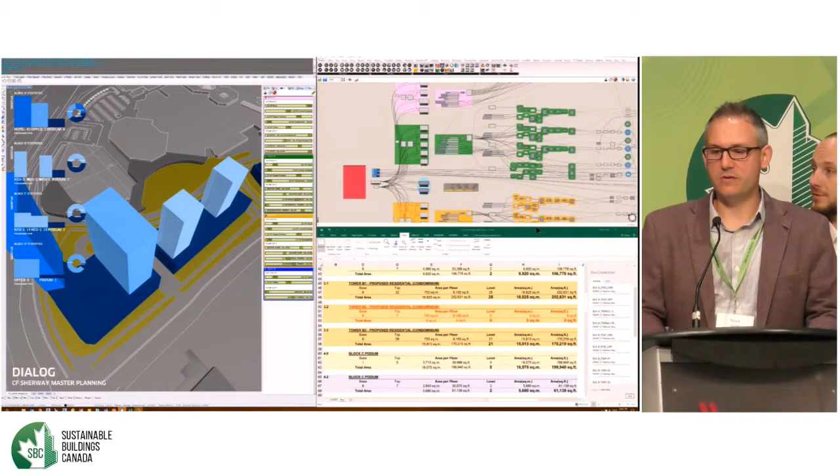feedback. So as you're doing the design, what you're seeing is there's a heads-up display that actually gives you your performance data as well as your areas; anything related to construction or the building in general can be defined as a dynamic variable that helps you through the process of design.

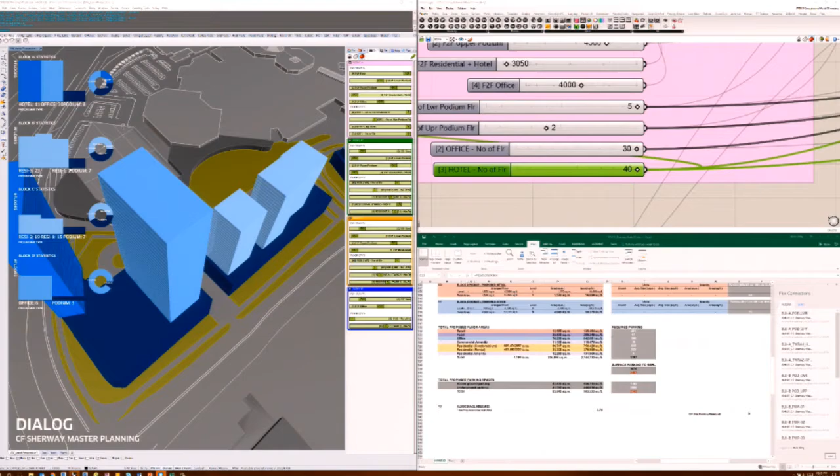So as we move forward, we have all of these interesting technologies and these ways that we're trying to design buildings, but this is where we're still at: 100% glazed facades, which are obviously not a very high performance building type. So what we're trying to do is address that and make it a high performance building type.

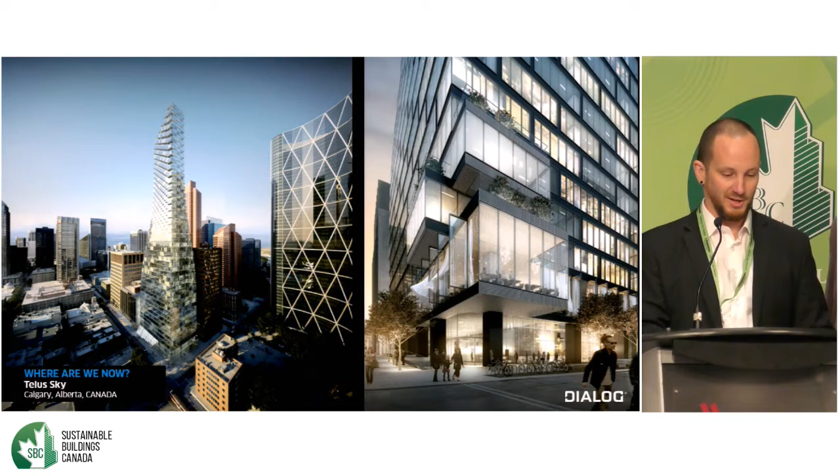And the goal here, or the idea, is not to call out these buildings as being particularly bad. Both of the designs that we just showed achieved or are pursuing high levels of certification through the LEED program, and were really designed by teams who were trying to do the best that they could with the parameters of the design that they were working with.

I think it's important to note at this point that these are somewhat the product of energy codes and standards that have set a line for performance where we can still trade off a poor thermally performing envelope with better but less permanent systems within the building. So you're keeping a 100% glazed facade, but you're driving really low lighting power densities. You're really maxing out your HVAC efficiencies. And unfortunately, those systems can somewhat be temporary or subject to the whims of a tenant or future retrofits.

It's not always going to be like for like, and this tends to lead to drift in building performance over time if they're not properly maintained. Whereas a really well designed, detailed, and installed section of opaque wall should really last and continue to perform at its design level for the life of a building.

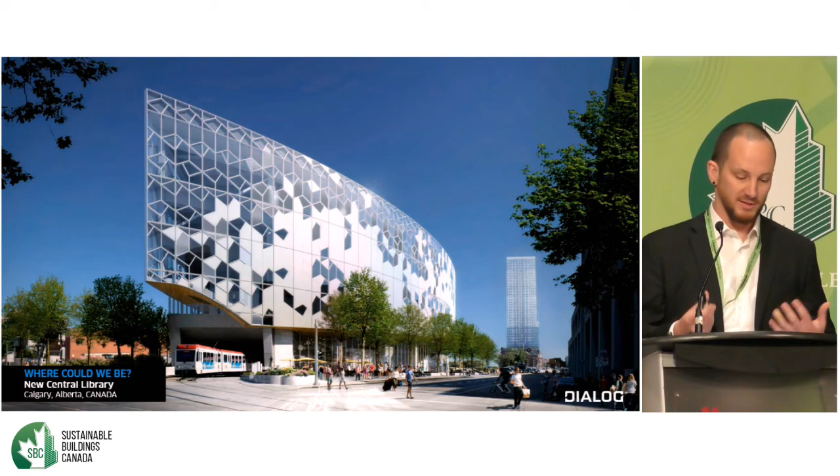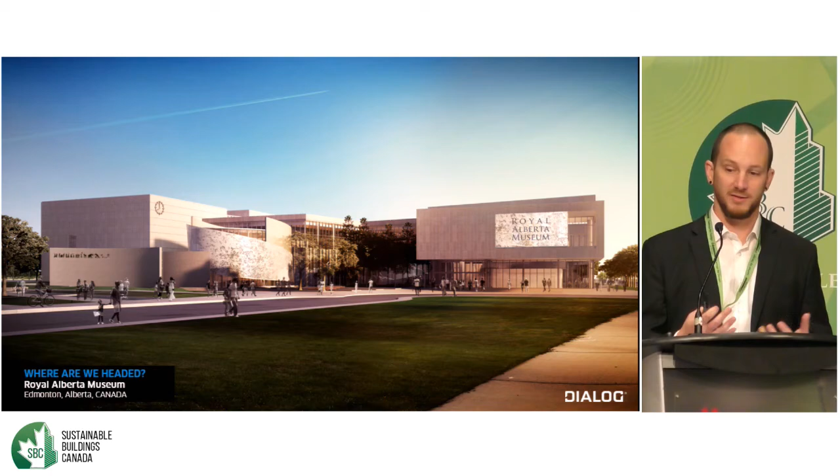With the Royal Alberta Museum, there was the idea again of keeping the window to wall ratio as low as possible. So glazed areas were clumped around the big feature lobby and reception areas, while maintaining a very highly insulated opaque section. This has also really helped control for the strict environmental requirements that are inside gallery spaces in museums.

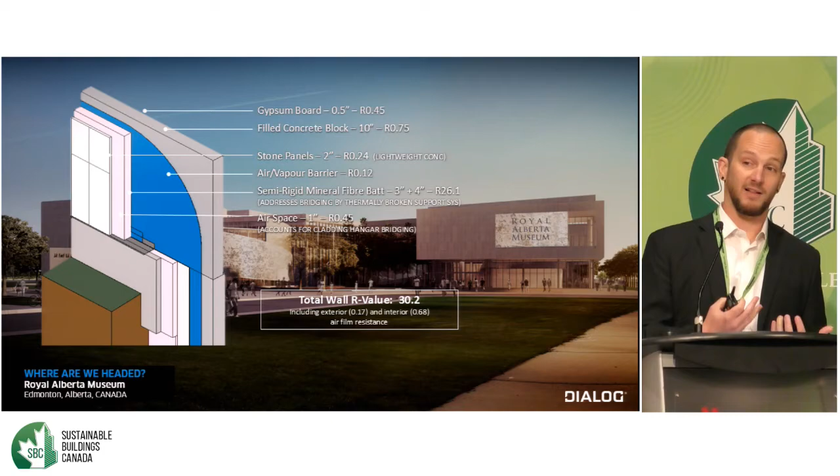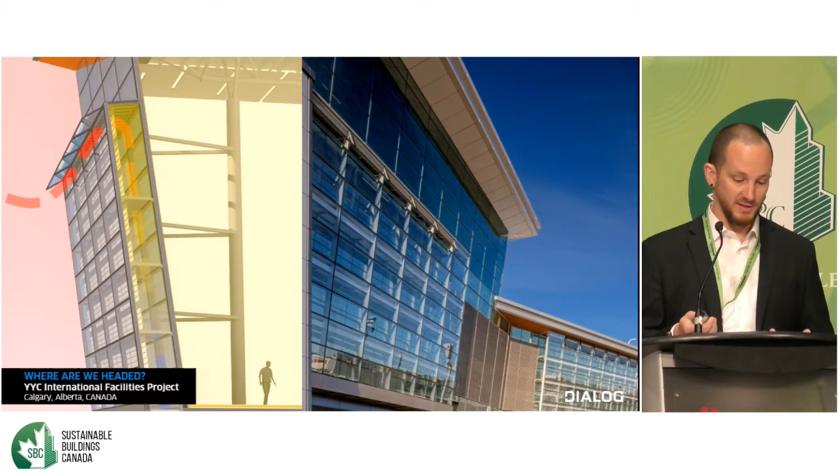Because obviously design is your first kick at the can in order to actually address performance and build for a sustainable future. But before you get there with this specific client, there's a sense of education that needs to be had in terms of teaching them that it may not necessarily cost more, or the value and the return is actually there, they just don't know it yet.

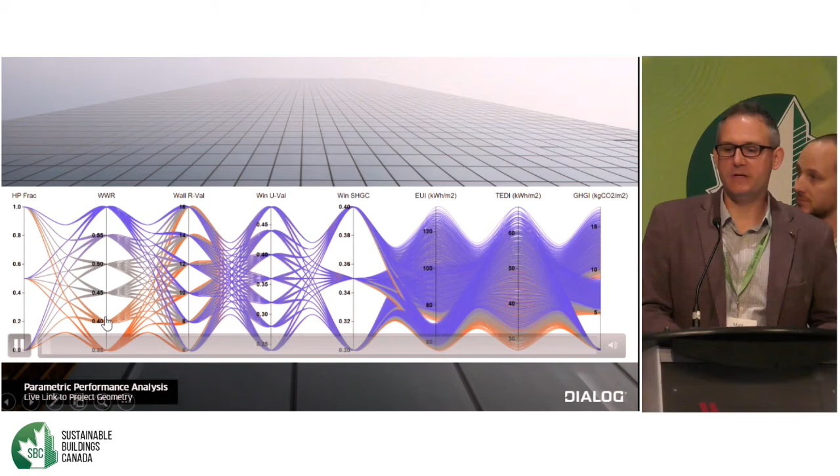Yeah, that's funny actually. Everyone's laughing. No one's done that before. And this is a room full of geeks.

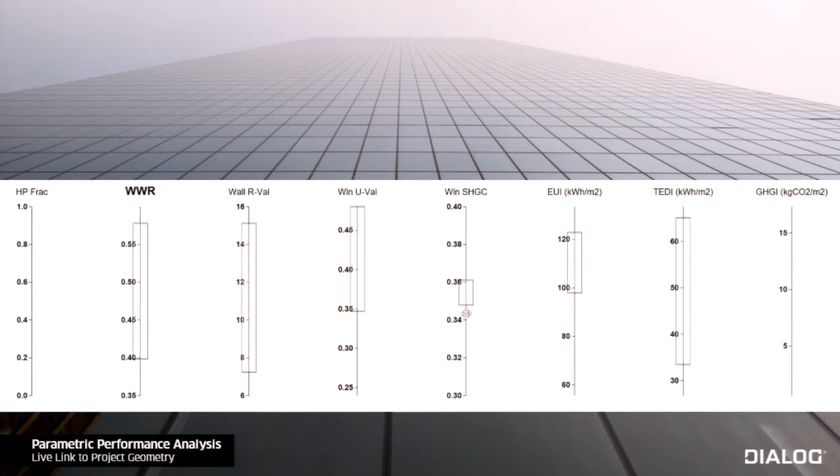So what we're doing here is we're actually limiting different targets, and we're trying to explain to the client as we're targeting this, what are our overall energy targets? What is the standard we're trying to achieve? And this is just a graph that plots what our number of possibilities are. So obviously if we're looking for something that's significantly high performing, the thread is going to get very thin, right? But as we broaden our horizons and we start to incorporate things like systems into this, then we can start to address the different elements.

I mean, so are we there yet? There's been a lot of talk of future codes, standards, and rating systems that are coming out that are really driving energy efficiency even deeper into what's necessary for building design. And with a lot of these, particularly things that are ratcheting upwards, like the 2030 challenge, new targets under version 4 of LEED, are pushing that bar high enough that things are really going to have to start being addressed at the building skin. We're moving beyond the regime where we can just trade off fancier systems and control routines on the inside of the building, and need to start building a more resilient thermal envelope on the outside.

I remember when the 2012 version of SB 10 came out, and thinking like, oh, well, that's the end of window wall condos. But it clearly hasn't happened after 5 years. And so there really is that feeling that there's something that needs to be pushed a little further to make sure that we are actually building these buildings that have a degree of passive survivability and are truly resilient.

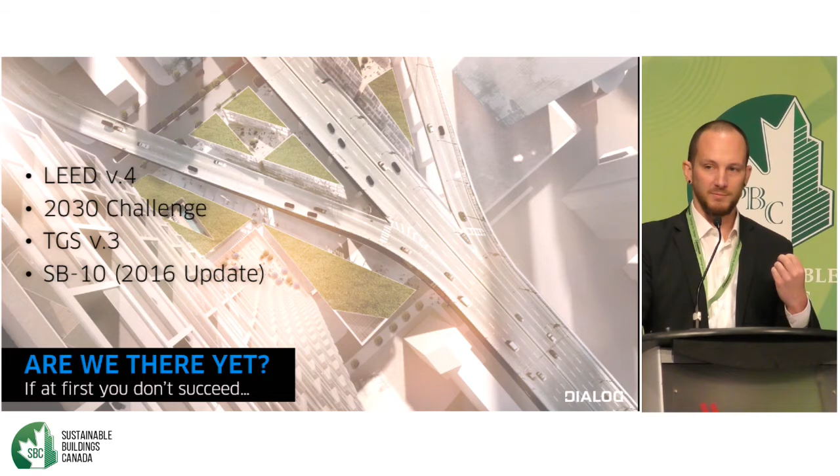And even some of these new codes, particularly City of Vancouver's new energy standard, as well as the CAGBC's Zero Carbon Building Program, are starting to include metrics that have to be met that exclusively address the building envelope, thermal energy demand intensity, or TEDI. And I believe it is coming quite likely to the new Toronto Green Standards. So it's something that the industry as a whole is going to have to really wrap their heads around as far as just what these high-performing envelopes that are needed are going to look like and what it's going to take to put them all together.

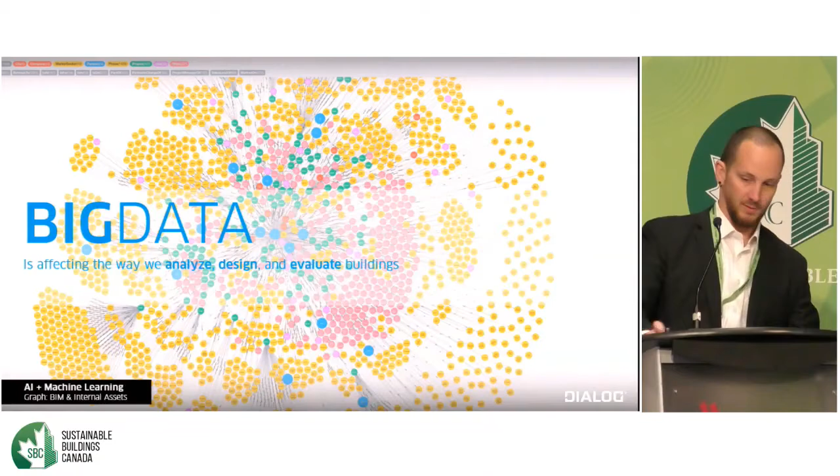So what does big data have to do with all this? Mike, I'm sure, will be able to talk to that. But essentially, all of these standards that have been and are being developed, policies that are being developed, building performance, pre-design, design, post-occupancy. We have a couple of initiatives going on right now where, on one of our projects in Vancouver, the Nest, we're working with researchers to analyze Wi-Fi patterns to understand and compare those against building heating and cooling loads, where people like to sit, so psychometric analysis. All of this information we're actually warehousing and keeping track of. And our systems that we're showing you computationally in our design systems are actually informed by these things.

What you're seeing in the graph there is a series of active connections. This is a machine learning graph that is actually adapting as things are happening. So as we pull in live information from all these various sources, whether it's design that we're working on within the studios, or whether it's coming in from this research Wi-Fi analysis of the Nest, these connections actually populate new metrics. And so we start to understand what is connected to people, buildings, performance. All of these things actually start to develop autonomous relationships with one another, which is really interesting and is really helping us guide the way that we design buildings because it helps push us in directions that we may not have thought of previously.

So this is a project, again, with EllisDon, Andrew, we just met a few months ago, where we use this building as a prototype. So this was a design build with EllisDon. And what we did was we used this building, as I said, as a prototype to study, and this is a video actually, so I'll just talk over this video, that shows how we're analyzing solar radiation gain at the same time that we're actually using that information to design the building's facade.

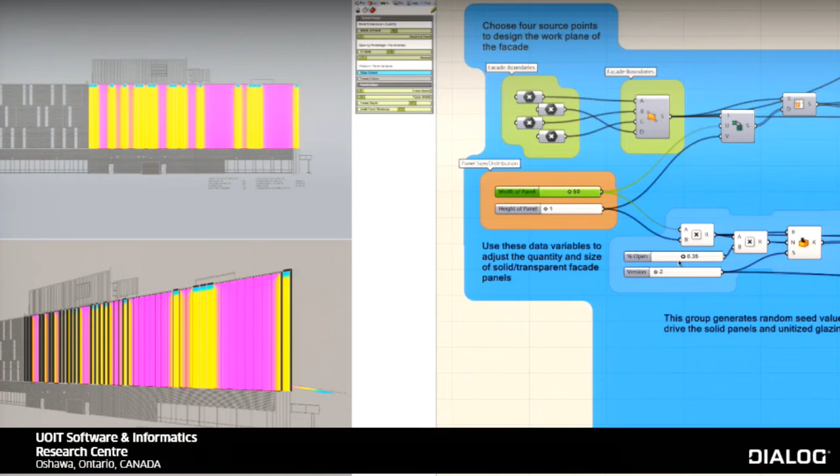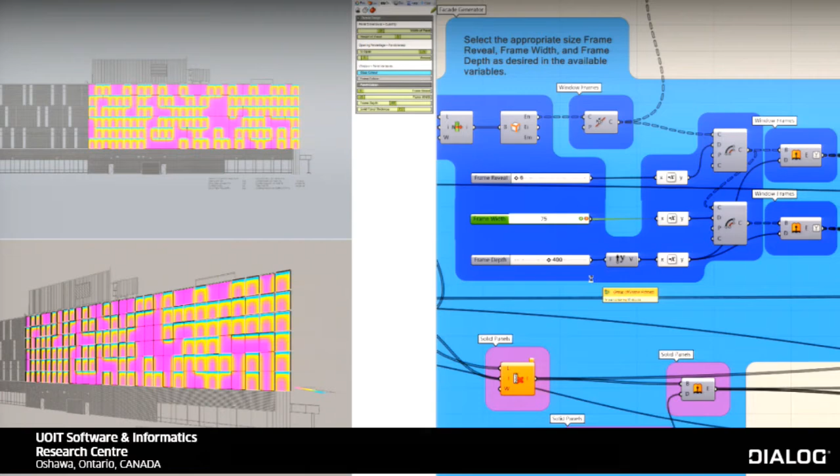So this was a post-design analysis. We used this as a case study to try and figure out what could we have done with our unitized glazing units versus our solid panels? If we had to put shading devices or extruded mullions, how much energy would that have saved? How much shadow could we have cast? And you can't really see it, but in the bottom right corner of the top left window, we're actually calculating in real time the cost that's related to these decisions. So we have a concept of design, we have a concept of performance, and we have the context of the local municipal cost of something like that in that market.

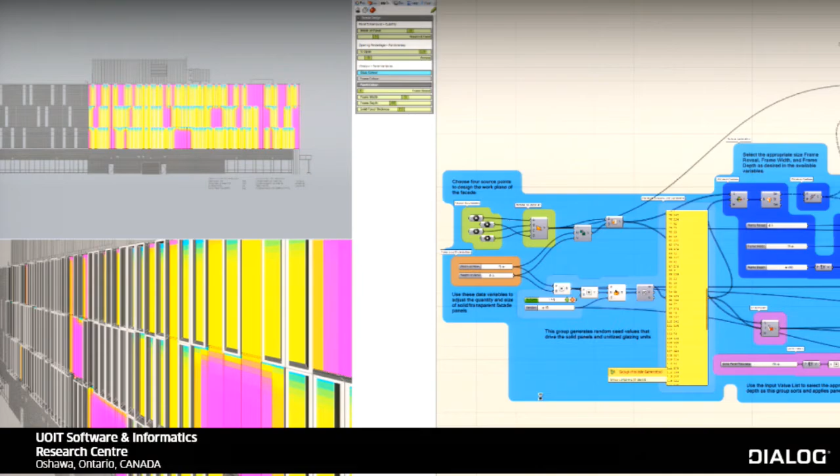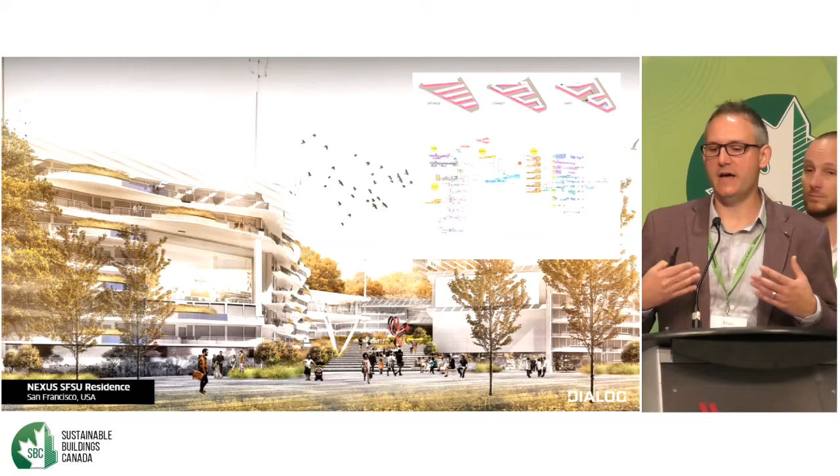So I'll just go to the next slide. So this is another example where we used computation to essentially design the building's form based on performance factors. So in the top right corner, what you can see is how we graphically step through different iterations of the design. And below that, again, you see that wire diagram that essentially establishes all those connections that harness the information that helps us define the shape of that building and what that means for performance and orientation and, again, psychoanalysis. This is a student residence, so how people share rooms, how they perceive space, right?

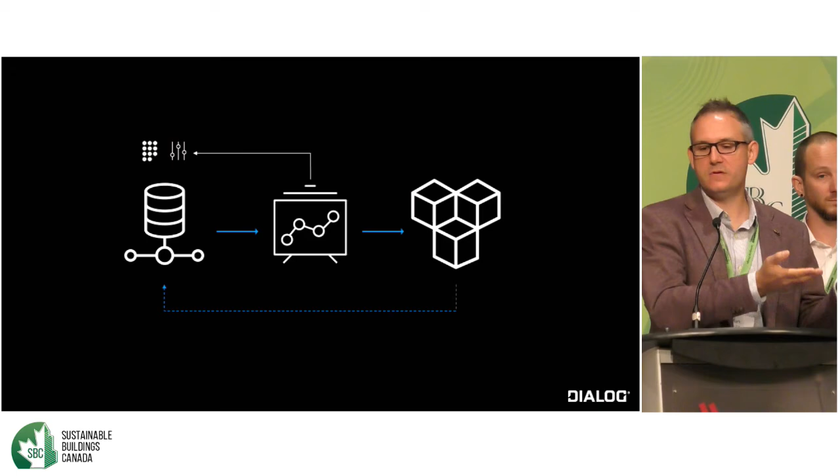And those are elements that have ranges that we can actually play with to help us dynamically define how the design and the systems work and how we can incorporate. So it allows us, just like that graph you guys saw where we were charting the trajectories of our possibilities, we can do the same thing with the standards or performance that might be available to us. We may select one type of system, VAV or something like that, for example, which might have an impact on and define what our options are in terms of glazing performance down the line, right? So these are all the things that are dynamic.

Then what we do is we chart that into our system, we bring it in, and that defines geometry or form. Well, it doesn't define geometry or form, but we use that to make decisions on what the building looks like and how to plan the space. And then through those decisions, we find out that there are problems and we need to redefine those. And so we go back to the beginning, and that's the iterative process of design. It's just a little bit more informed now.

So lastly, the last video we have is essentially visualizing, and you'll have to bear with us because this is still very much in development, so the graphical user interface is a little bit rough. But this is what we're using to talk to clients, where we sit down and we have a series of baseline metrics, and we say, okay, we're going to target LEED, or we're going to target 2030. What are some options we can use if we choose a window wall ratio of a certain factor versus our R value for our envelope, and what is that return in terms of EUI reduction based on those decisions?

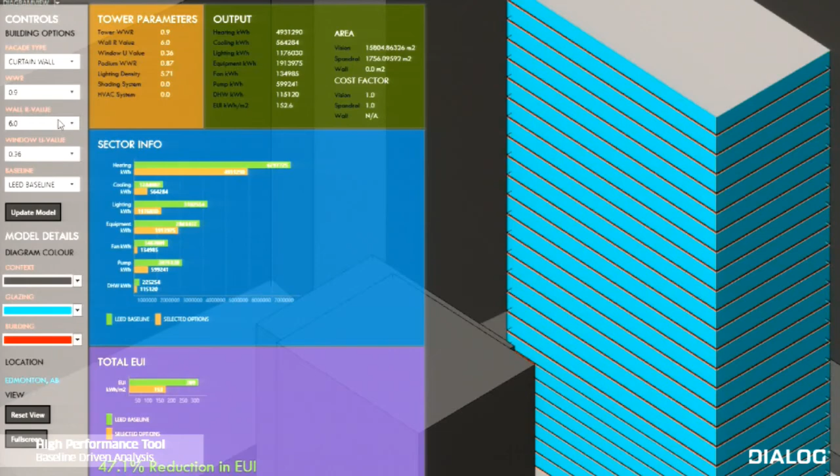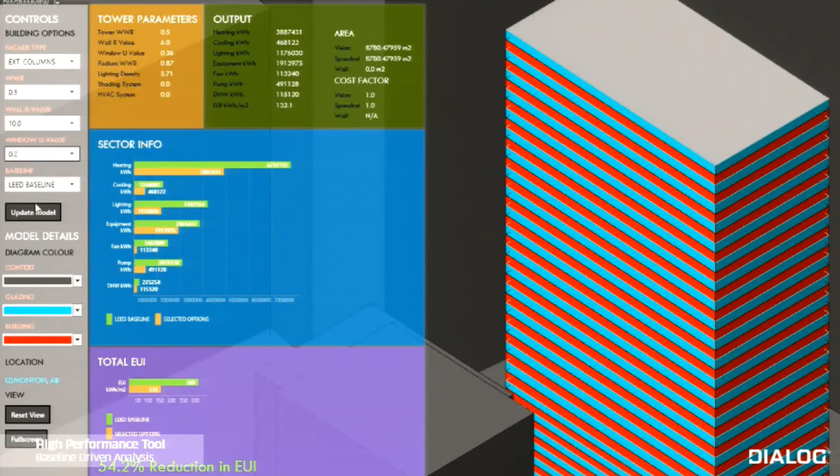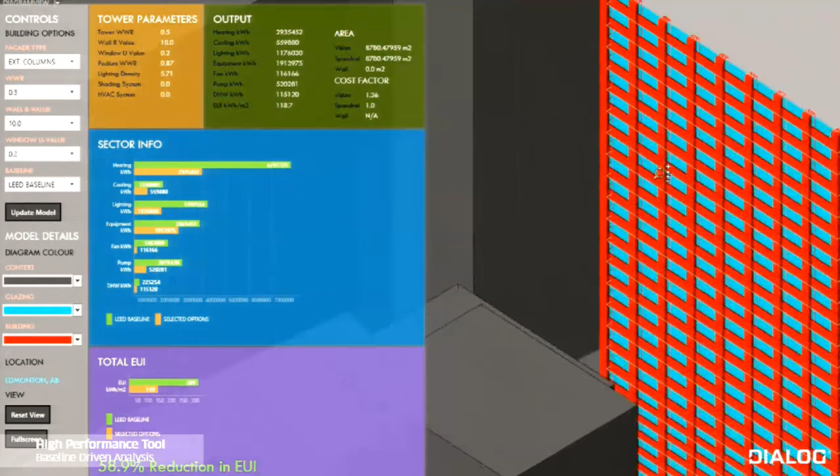So you can see as we move through here, on the left you'll see the red is solid, the blue is the glazing, but as we start to discuss different levels of opaque facade and vertical columns, so we can do exterior exposed vertical columns, we'll obviously see that our reduction will go up, right, because we've got less glazing. So we're just trying to educate the client, and obviously we wouldn't present it to them in this manner with some ghastly solid columns. We would actually create something that's a little bit nicer.

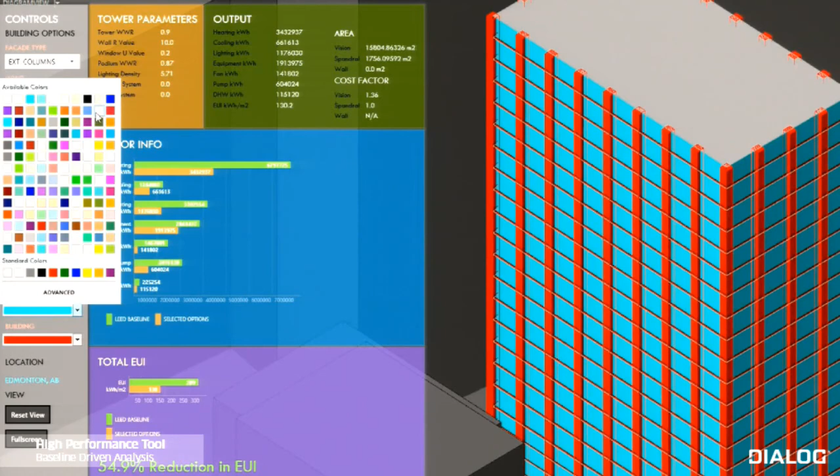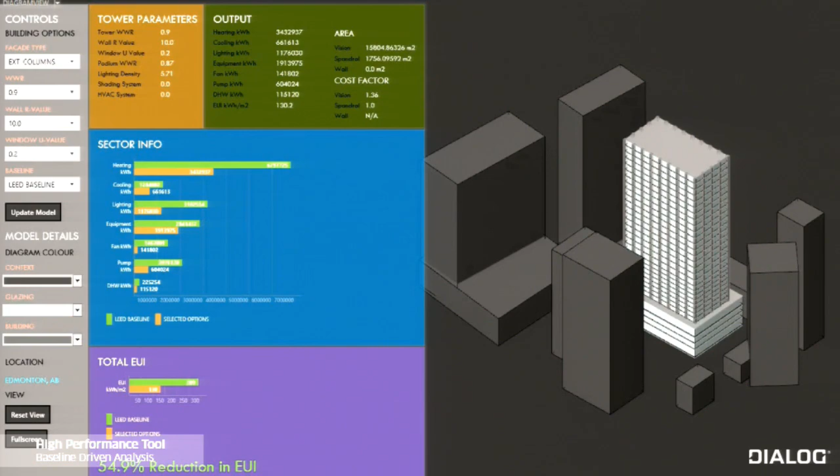But this is just meant to illustrate that process so that we can have those discussions with our clients and say, look, we can do this well, we can make it look nice, and we can still achieve the standards that we need to in order to make this a better place for everybody ultimately, and obtain our targets as per our agreement with the Paris Accord. So I think, yeah, that's pretty much it for us.